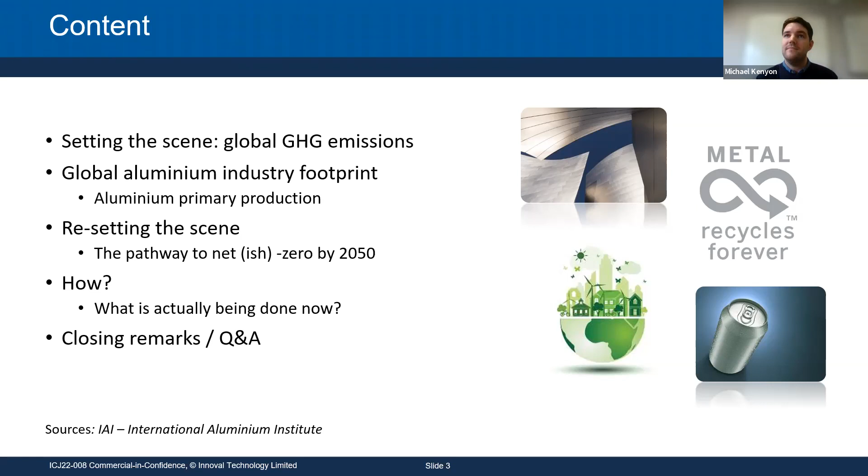First, we're going to set the scene in terms of global greenhouse gas emissions. This particular figure on the left highlights, from a global standpoint across all sectors, where those emissions ultimately lie. This figure is from 2016, and the total greenhouse gas emissions was around 50 billion tons of CO2 equivalents. I've highlighted a box in the top right-hand corner where around 10% of those emissions come from the production and use of energy in industry, specifically the steel and aluminium industries.

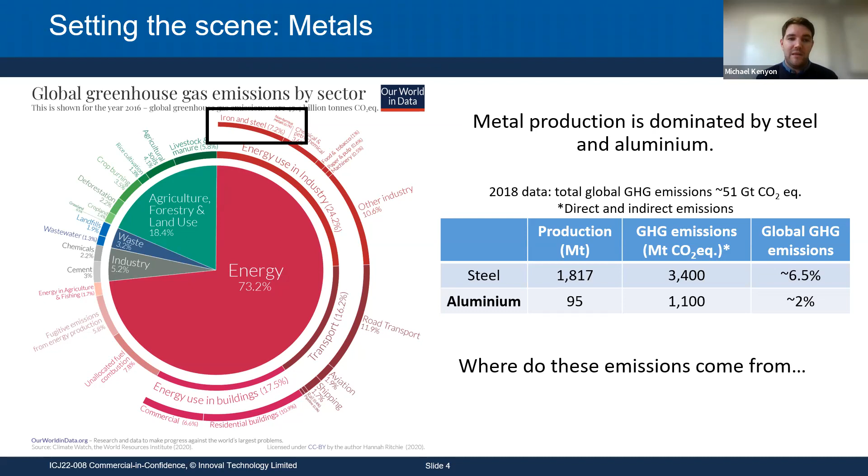I've got some more absolute figures in the table on the right. The aluminium industry contributes around 2 to 2.5% of global greenhouse gas emissions as of 2018, while the steel industry contributes around 6.5 to 7.5%. I work specifically in the aluminium industry, so that's where we'll base this talk. If you want to see a similar talk on the steel industry, a previous speaker last month gave that talk, and I'll put the link in the chat afterwards.

In terms of the aluminium sector emissions, unsurprisingly, most of those emissions occur from primary production, and I'll go into detail in a minute on the exact process routes within primary production. I've highlighted the breakdown within primary production in this red box on the chart. This chart was produced by the International Aluminium Institute, among some other consortium. Many of the figures in this talk have been produced by the International Aluminium Institute and European Aluminium, and it's only due to the really good work those organizations do in collecting the data that has allowed a pathway to be made in the first place. There's a lot of credit due to those organizations in this talk.

If we break that emissions down in terms of primary production, you can see that of the 1.1 billion tonnes contributed by the aluminium industry, the majority is associated with the electrolysis stage of primary production, the smelting stage. But we also have contribution from refining bauxite to alumina, as well as anode production, with a very small contribution from casting relative to the other operations.

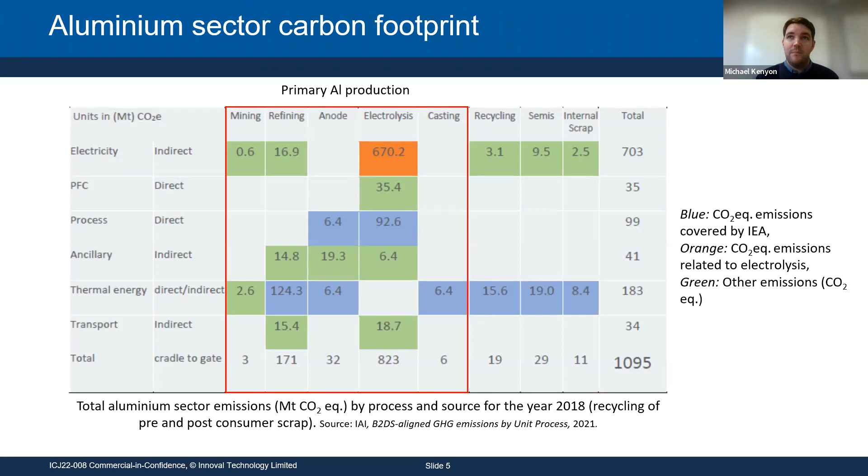Looking specifically at the primary production route and understanding where those emissions come from, we initially start with the mining of the bauxite ore, which is a reddish clay material. In terms of greenhouse gas emissions, mining actually has a relatively low contribution overall, but there are other environmental impacts that are important to consider, such as resource depletion and land use.

Once we've mined that bauxite, we need to refine it to alumina. Bauxite contains a high content of aluminium, and we need to extract that first into its aluminium oxide form, alumina, through the Bayer process. The main contribution to greenhouse gas emissions within the Bayer process is mainly from the thermal energy requirements, where the bauxite is heated in a solution with sodium hydroxide. It's fed through a system to remove some impurities, then washed and cleaned and eventually dried, again requiring thermal energy input to produce a pure white powder, which is alumina.

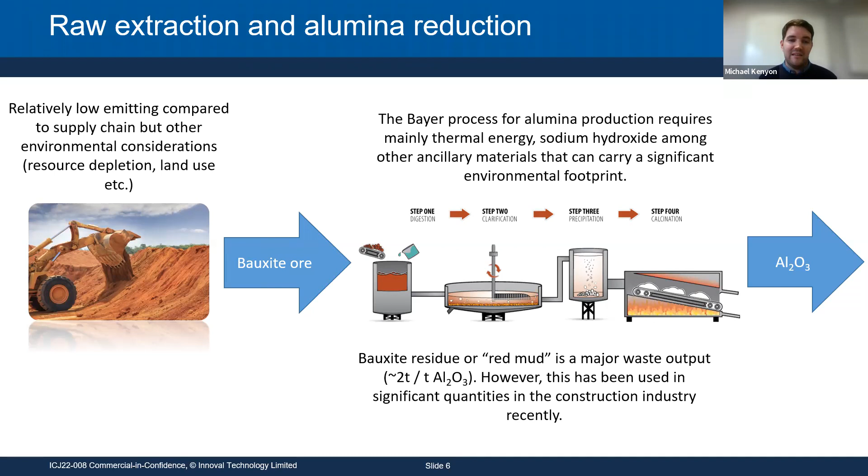One of the main other considerations environmentally from the Bayer process is the main waste output, which is red mud, or bauxite residue, which can be toxic. However, significant quantities of this have been used in the construction and cement industries, but the waste management of bauxite residue is a key environmental impact for the industry.

Moving to the next stage, we have our white powder, our alumina. Now we come to the smelting, the Hall-Héroult process. It's really the electrical intensity of this process where most of the emissions come from. Actually, within the primary production route, around 75% of the emissions occur from the use of energy for the smelting stage, because we need to reduce that alumina to aluminium and oxygen.

This is done in an electrolytic cell, or pot. An example is given in the figure here of a number of electrolytic cells. What happens in this system is you have a cathode and an anode, and the alumina is added to a molten electrolyte at around 960 degrees. When electrical current is applied through the system, the alumina is reduced to pure aluminium and oxygen. The oxygen then combines with the carbon anode, producing CO2 as a direct byproduct of the smelting stage.

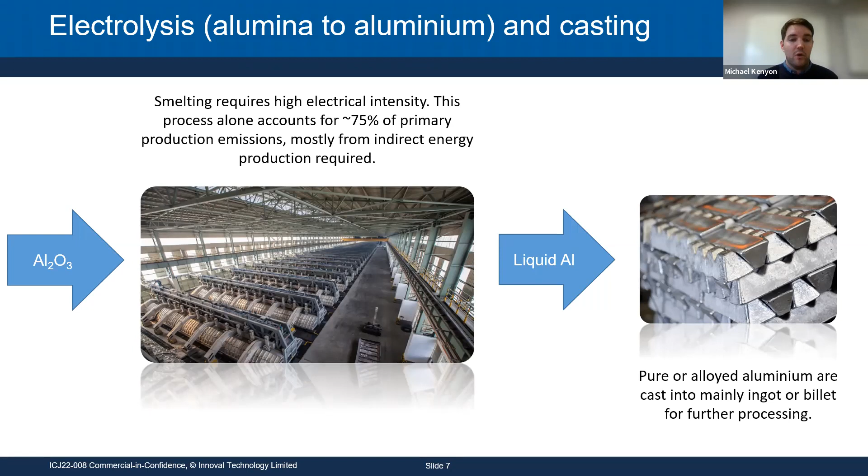Then we have the molten aluminium, which is siphoned off and cast into ingot form. So as highlighted, it really is the electrolysis stage where the major contribution to greenhouse gas emissions occurs, among other areas within the global industry as well.

The International Aluminium Institute, with some data from the International Energy Agency, have modeled the reduction in emissions required to achieve the targets set out in climate change legislation and in many conferences, including the recent COP26. In essence, what we need to try and do is keep temperature warming to below 2 degrees versus pre-industrial levels. This is called the beyond 2 degrees scenario, and that isn't net zero per se, it's just to try and limit the temperature warming to below that 2 degrees.

More recently, coming out of mainly COP26, that target really needs to be below 1.5 degrees, and I'll be touching on that in a few slides. If we have a look at the modelling that was done to consider the emissions that would be allowed within the industry, broken down among these operations, this would incorporate a lot of the solutions that I'll be discussing later on.

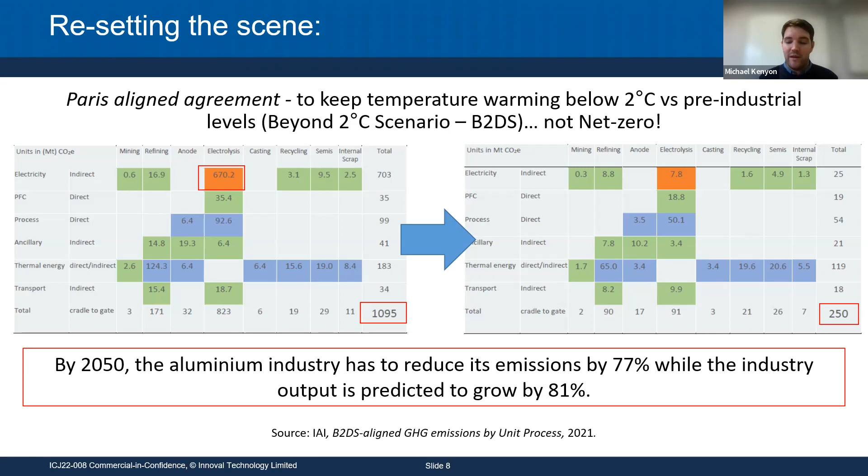Overall, if we look at the bottom right-hand corner of these two tables, which gives the global greenhouse gas emissions for the industry, where we are in 2018 is 1.1 billion tonnes. We need to reduce that to 250 million tonnes, a reduction of 77%, while maintaining forecast growth within the industry of 80%. So it's quite a daunting target.

I've highlighted that at the minute, the main contribution occurs from that electrolysis stage, and it's actually the source of electrical energy that's required which is contributing to those greenhouse gas emissions. Under that modeling, they looked at what the breakdown of energy source would be in order to keep that temperature rise to below 2 degrees, and that's represented in this figure here. So you can see where we are today.

There's predominantly coal-based, fossil fuel-based energy source for the smelting power mix. We have some renewables in there, mainly hydro and nuclear. Nuclear, not renewable, but it's a cleaner source of energy. And we have a contribution from natural gas as well.

Now, in order to hit those targets, you can see in the right-hand column that we need to significantly reduce that dependency on coal and natural gas for the energy source for the smelter power mix globally. And again, this is to achieve that target of temperature rise below 2 degrees.

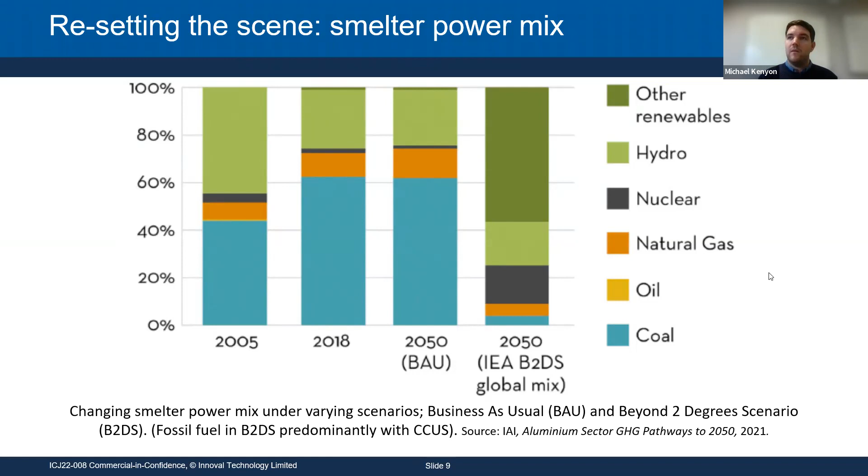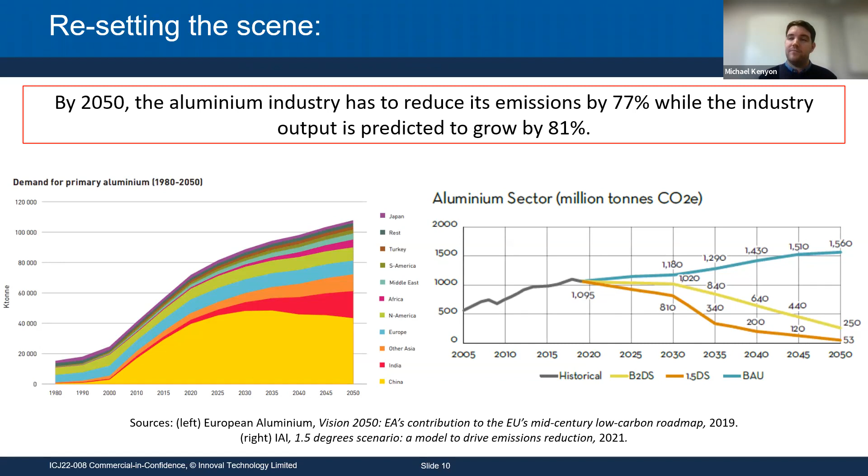So I'm just going to break that down a little bit further in terms of the primary production and the secondary production. There's going to be 5 graphs on this slide, so I'm just going to split it up into primary and secondary industries and what the sort of allowed contribution from those industries will be in terms of production and emissions.

If we first have a look at this top left-hand figure, under the 1.5 degree scenario, the primary aluminium production as of 2018 is 64 million tons, and that would have to increase up to 68 million tons in order to achieve the 1.5 degree scenario. Now that's in combination with the reduction in emissions from that process route. In 2018, per ton of aluminium, a global average is 16.1 tons of CO2 per ton of primary aluminium produced. Now we need to reduce that all the way down to 0.5 tons per ton by 2050, which is quite a significant reduction in emissions per ton of aluminium produced.

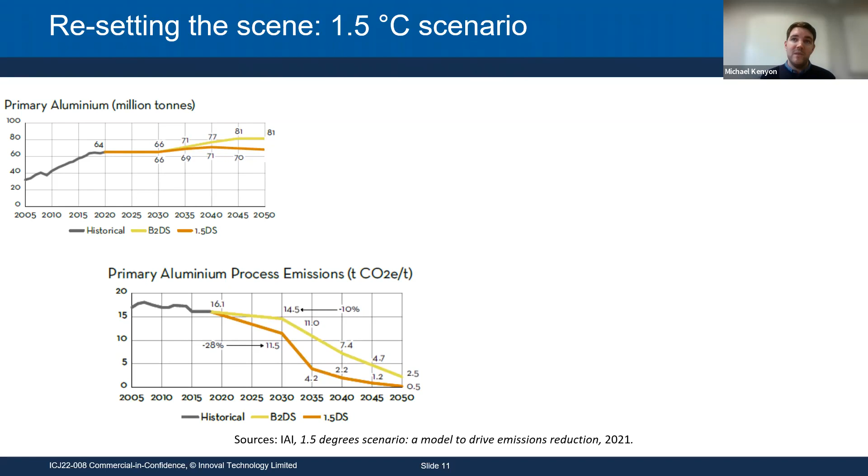And we'll talk about the solutions that are required for that over the next few slides. But that's the situation for primary aluminium production. That is in combination with the secondary aluminium production route, the recycling of end-of-life scrap and pre-consumer scrap as well.

So if I have a look at the production of end-of-life scrap, post-consumer scrap in this middle figure here, historically this has increased quite a lot over the past 20 years, and we need that to continue for the next 30 years, up to around 68 million tons within the global system. And again, that's in combination with reducing the processing emissions associated with recycling aluminium. As of 2018, those emissions for recycled aluminium are about 0.6 tons of CO2 per ton of secondary aluminium produced, and that needs to be reduced down to about 0.1 tons per ton.

And then we come to pre-consumer scrap, that's the scrap that is produced through semi-fabrication, for example. We need to increase our process efficiency, so reduce the overall amount of pre-consumer scrap that is produced. And of course, any pre-consumer scrap that is produced, because it is unavoidable, should be 100% used straight back into the system, as it is the cleanest type of scrap, of a known composition and of a known process history.

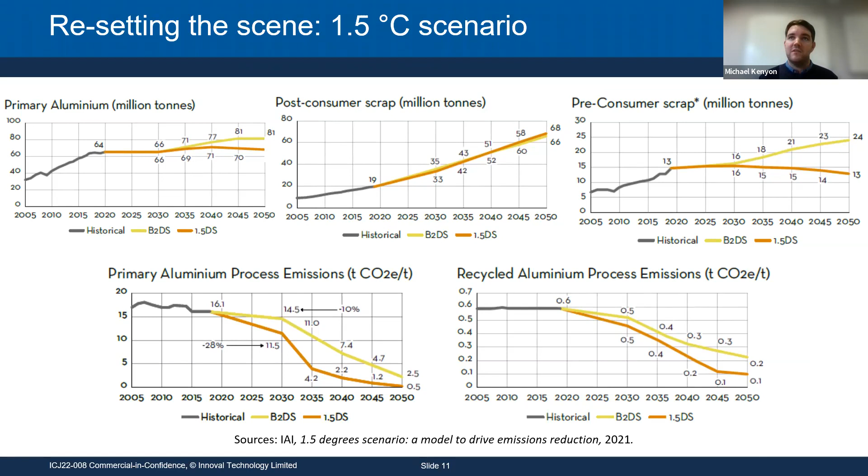So in terms of keeping temperature warming to below 1.5 degrees, this is the situation in terms of the primary production and secondary production routes for the next 30 years, the targets that will need to be achieved. So how are we going to do it? Because it is, in my opinion, quite a daunting task in order to achieve those targets. Well, again, in combination with the modelling, the International Aluminium Institute and other aluminium organisations have highlighted the solutions that would need to be put in place and that have been put into these models as well.

And in essence, there are three main pathways: electricity decarbonisation, which we've already touched on a little bit; direct emissions reductions from the primary process production route; and we also have recycling and resource efficiency.

I think it's important to say that all these three pathways need to be applied in combination. No one pathway alone, even if the entire industry was to incorporate it, would be enough to achieve those emission reduction targets. So they have to be employed globally, and they have to be employed universally across the industry.

I'm going to go into a bit of detail about some of these solutions, mainly the solutions that we can incorporate now, as of tomorrow. I'm not going to really touch on some of the other solutions that are in the pilot stage, or maybe a couple of decades from being utilized on a commercial scale.

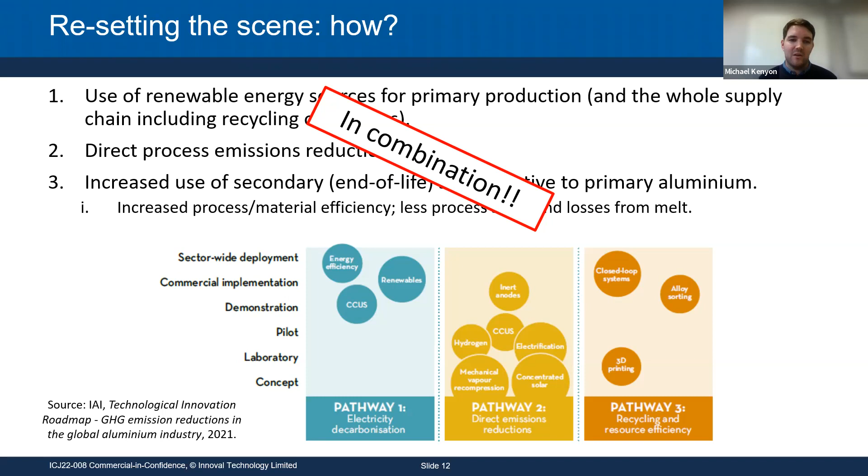So renewable energy, we've already touched on this. I'm sure everybody is already fully aware that we need to be using more renewable energy, not just for primary aluminium production, but across the full supply chain. But I just wanted to show the effect in terms of some of the absolute numbers of using just renewable energy for primary production.

This particular figure shows the effect of using predominantly fossil fuel sources such as coal-fired or gas-fired. So that might represent historically China or the Middle East in terms of the energy those smelters would use. And then we also have more mixed grid, maybe the EU and the UK, a higher fraction of renewables, but also still a dependency on natural gas and a little bit on coal as well.

But then we see on the right-hand side, if you can use 100% renewable energy source, that contribution to emissions per ton of aluminium really comes down. And the contribution is relatively minor compared to some of the other emissions from, say, the direct process, the thermal energy required, as well as the transport and ancillary materials as well.

But just as a reminder, even using 100% renewable energy source alone for primary aluminium wouldn't get you down to that 0.5 tons per ton we need to achieve by 2050 to achieve that target of keeping temperature warming below 1.5 degrees. But it's one of the biggest steps we can do, and it's something we can do right now.

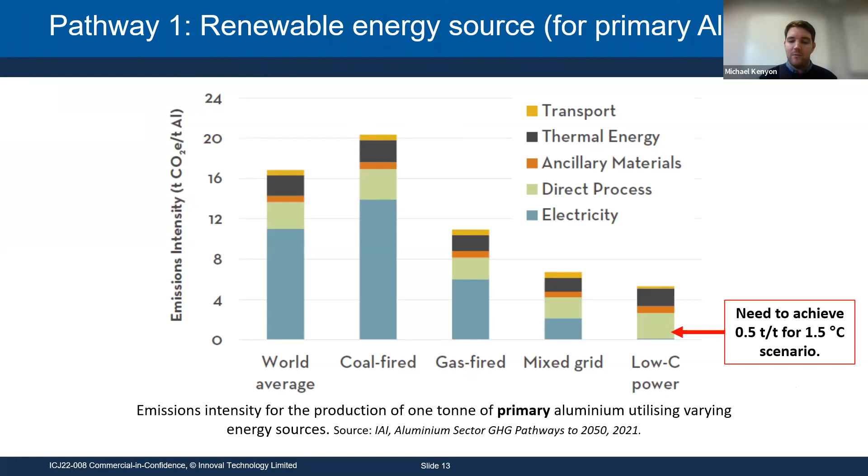So a lot of text on this slide, so I'm going to go through some of these points one by one. This is talking about pathway number 2 - actually pathway 3 on my previous slide - but a very important subject: aluminium recycling and moving towards a more circular economy. So I'm just going to talk about some of these stats that the industry uses quite a lot.

First bullet point here - this is quite an obvious statement, but it's always good to reiterate that recycling aluminium only requires 5% of the energy compared to the equivalent amount of primary produced aluminium. And because of that, because there's no dependency on smelting or refining of bauxite to alumina, the emissions are also significantly reduced by around 95% or more.

So that really just states that we need to be increasing the amount of end-of-life scrap that we are using. Generally, end-of-life scrap in terms of the economics is cheaper than primary aluminium, depending on the quality. Some scrap streams, maybe like lithographic scrap, which is highly pure scrap, might be quite close, maybe even a little bit more expensive than primary, but not too much more. You might have some dirtier scrap streams that are quite far away from the composition you're trying to achieve - they will be significantly cheaper than primary aluminium. So there's a broad range of prices that scrap streams can attain depending on their quality.

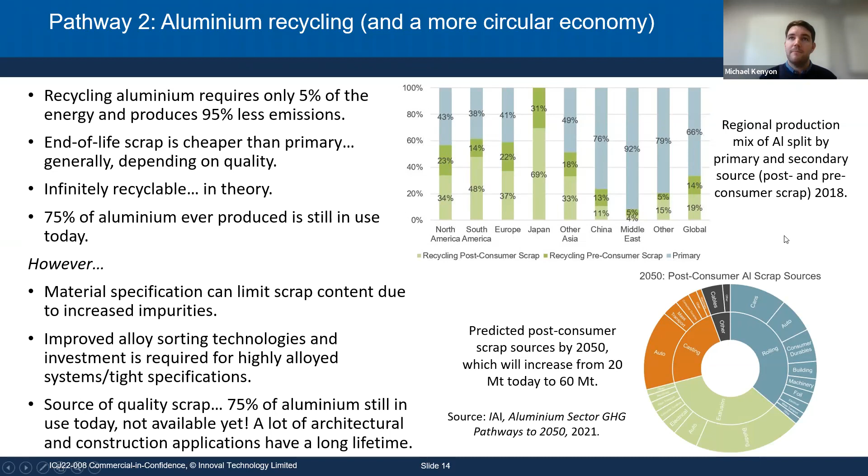So let's talk a little more about the details on the separation and sorting technologies that can be used for aluminium. Let's take an example of an end-of-life vehicle. Some components of that vehicle might be taken off before it's crushed and shredded, maybe the wheels, some of the engine block components. Ultimately, a lot of the vehicle will be shredded.

Firstly, we have to separate the metals from the glasses and plastics. Once we have the metallic fraction, we separate magnetically the ferrous and non-ferrous metals. Then we might have a stream of aluminium, which we can further separate using technologies such as X-ray fluorescence, X-ray transmission, or even laser-induced breakdown spectroscopy. LIBS is particularly efficient at separating some of the more distinctive alloy grades, even within the 6000 series family or 5000 series family.

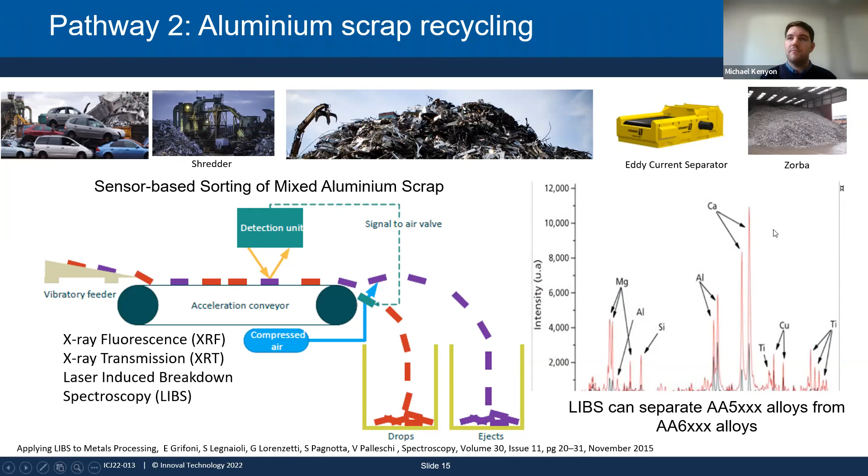Incorporating some of these systems is going to be key to developing scrap streams closer to the composition you're after. I just wanted to give an example, a case study, on the fact that you can produce alloys that have low tolerance to impurities or tight specifications from a lot of end-of-life scrap.

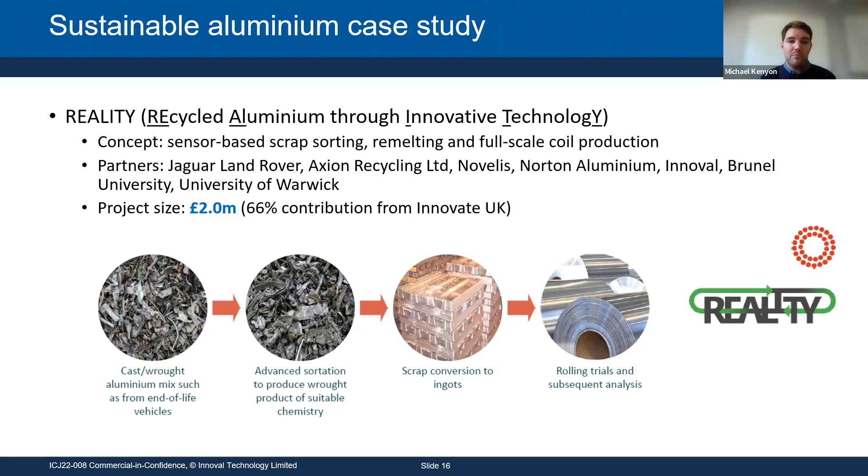This particular study, which was government-funded and that Innoval was part of, was called Reality. It was a few years ago now. We had a number of consortium members on board, including Jaguar Land Rover, Axion Recycling, Novelis, ourselves, and a couple of universities. This case study looked at taking sometimes quite a dirty scrap stream with a mix of alloy grades, using advanced sortation methods, melting and casting, and developing that material to achieve the material properties of the original component equivalent made from primary produced material.

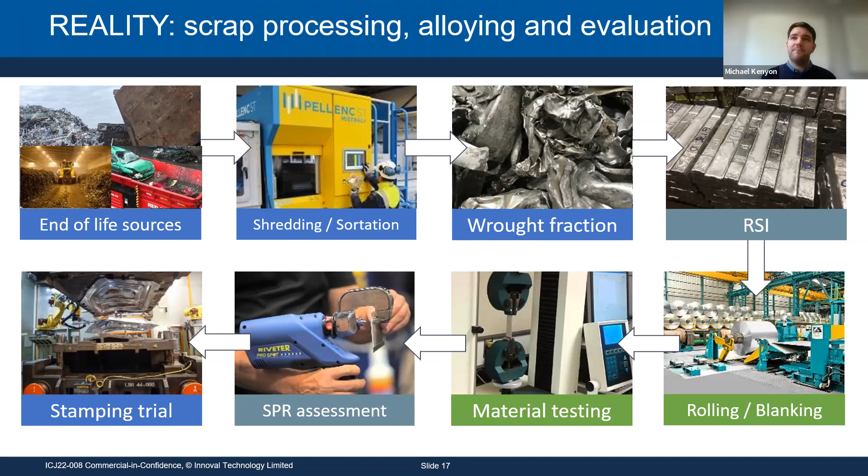This project really covered the full cycle of that scrap, and if I remember rightly, did achieve producing some 6000 series alloy for automotive applications - from 50%, 75%, and even 100% end-of-life scrap.

So that was just touching on recycling and the importance of increasing the use of end-of-life scrap now and in the future. Now to my next pathway, which is direct emissions reduction. As I mentioned earlier, within the electrolysis stage, the oxygen reduced from the alumina combines with the carbon anode, and CO2 is a direct byproduct of the electrolysis stage.

For a number of decades, inert anode technology has been researched, but I think it's only more recently that significant investment has allowed that technology to really be developed and used on a commercial scale. I've included here a company called Elysis, who is developing inert anode technology. This technology will replace the carbon anodes in existing smelters, and it's claimed that it will eliminate direct CO2 emissions from smelting, actually releasing oxygen as a byproduct. I've put a couple of very recent articles up to show that this is really at the forefront of trying to reduce emissions within the global aluminium industry.

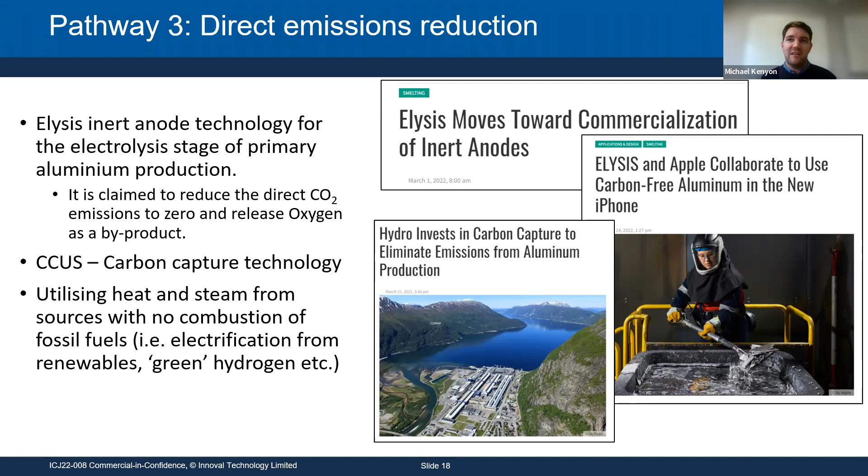I'm not going to talk about hydrogen, because I think that's something for the future. That's not something we can use right now at the scale we want for the global aluminium industry, and there are many other industries also looking to use green hydrogen. So I think that's one for the future, in my opinion. Putting the infrastructure in place to supply the amount of green hydrogen we'd want to use is at least a minimum 5-10 years away.

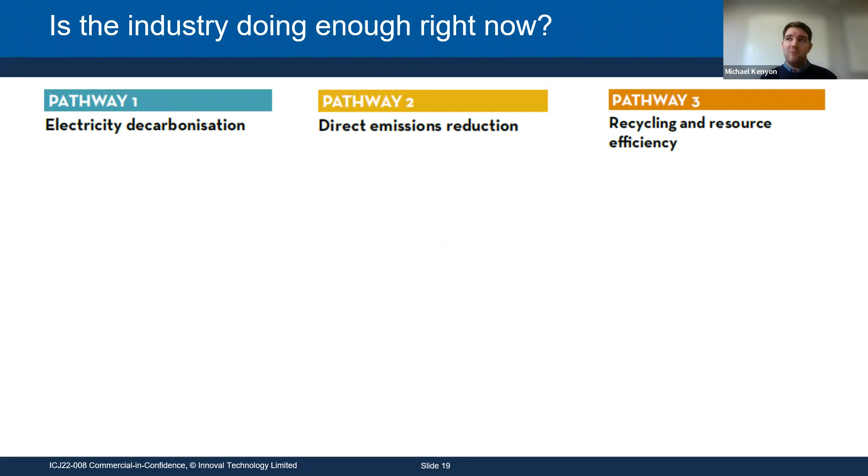So again, I wanted to highlight what is happening right now. We hear almost on a daily basis that we really are at the point of no return in terms of putting significant action in place to help reduce our emissions and achieve those targets. I just wanted to highlight a few things to show that at least the aluminium industry is moving in the right direction, as well as some other metals industries. I think having these pathways so clearly laid out really helps the industry incorporate these solutions.

In terms of pathway 1, this figure shows the global power mix used for the aluminium industry, specifically for smelting. I haven't put the legend on here, but the brown bar is coal-based energy source, and the blue, yellow, and purple are renewables, with blue being hydro. Over the last 5 or so years, the contribution from renewables and hydropower is increasing, while the contribution from coal and natural gas is decreasing. So things are changing and moving in the right direction in terms of electricity decarbonisation.

There are some really good examples online of this, and some OEMs are trying to incorporate this into their systems. One example highlights BMW Group, who have sourced a lot of aluminium from the Middle East, where we now see these giant solar farms, some of them dedicated to providing energy for smelting operations. That's a really positive thing to see, and we need more of that.

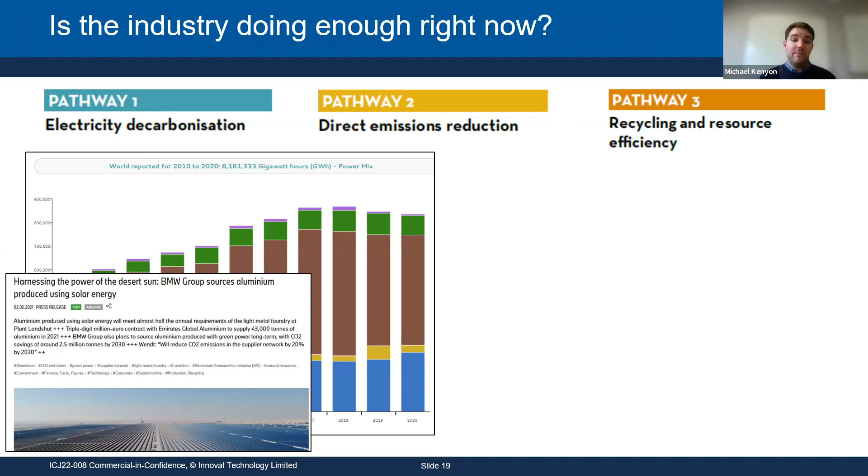Again, I've already touched on direct emissions reduction - people investing in anode technology, trying to progress it to be used for the high volume production we need, and investing in carbon capture technology. I'll refer back to this graph in terms of recycling. You can see historically, in terms of post-consumer scrap, things are moving in the right direction. We are using more and more, and we just need that to continue, if not accelerate, ideally, in the amount of end-of-life scrap that we are using.

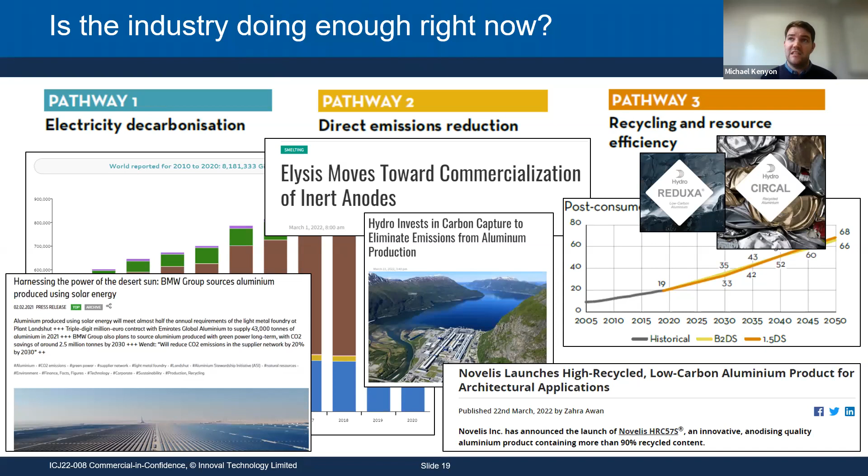Many companies are now evaluating their entire portfolio to try to introduce alloys that specifically have higher recycled content - hopefully mainly end-of-life scrap content, but will ultimately also incorporate some pre-consumer scrap. Just as an example, Hydro have a range of alloys, Reduxa and Circal, and Novelis have also started building their portfolio, as have Constellium. Many of these large aluminium companies are really starting to put their recycled content alloys on the market, and some of them even give absolute figures in terms of at least a cradle-to-gate footprint in their primary aluminium - whether that's 4 tons per ton of a particular alloy portfolio, or even lower.

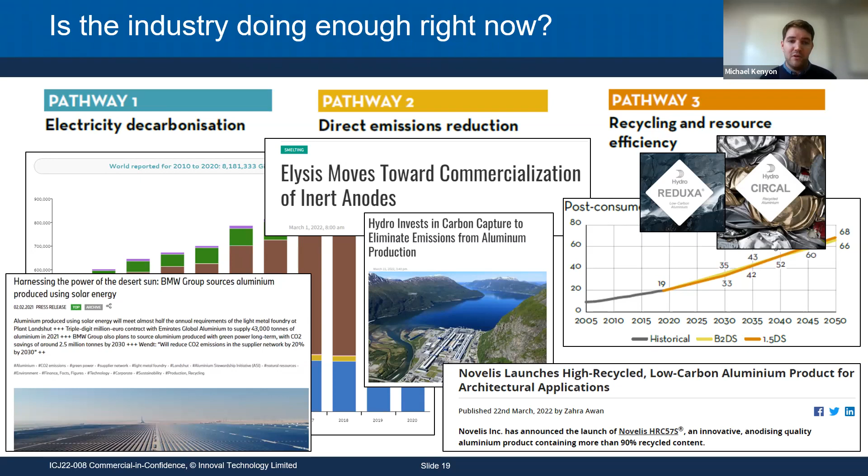So I'll come to my final slide and closing remarks. We know the aluminium industry needs to reduce its emissions by at least 77%, and that's just for the beyond 2 degrees scenario by 2050. Ideally, it needs to be up at 95% reduction to achieve that 1.5 degree scenario, while maintaining steady growth of around 80% for the next 30 years.

In the future, I've put lower carbon primary. So again, maybe some primary production that is starting to incorporate the inert anode technologies, the carbon capture technologies, still increasing our use of end-of-life scrap and closing that loop in terms of a more circular economy.

And then at 2050, we know what we need, we know where we need to be. We need to have primary aluminium that really has a significantly low footprint compared to where we are now. We're talking at levels of 0.5 tons of CO2 equivalents per ton of primary aluminium. We need to maximize our use of end-of-life scrap content.

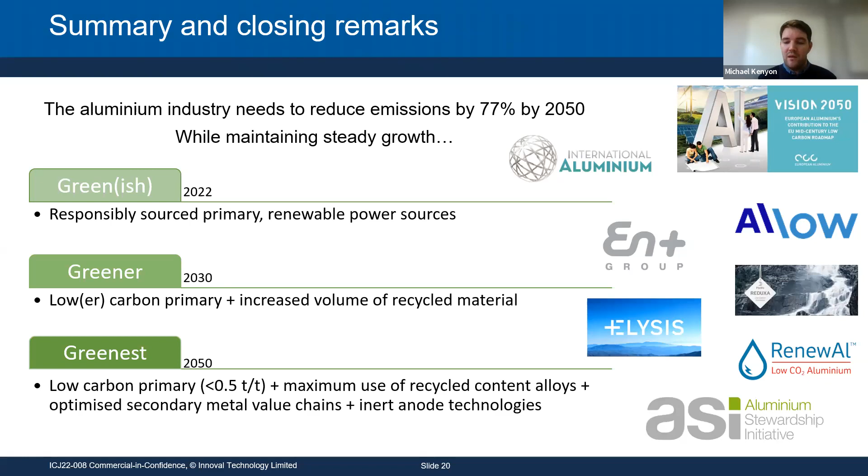That involves optimizing that secondary metal supply chain, and the quality scrap streams need to be developed, as well as incorporating those inert anode technologies and more carbon capture technologies. Altogether, all those solutions need to be made in combination. So thank you very much.